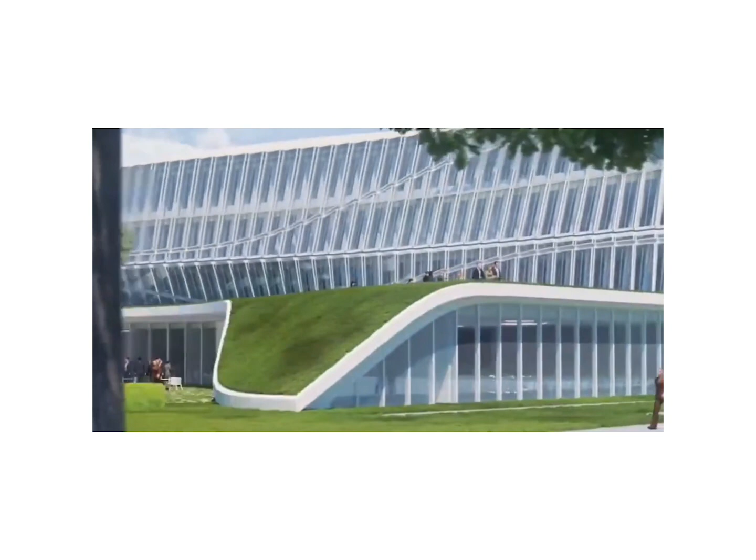The Olympic House serves as the International Olympic Committee's headquarters, exemplifying sustainability and innovation with certifications like LEED Platinum, featuring low energy elements such as photovoltaic panels and rainwater systems. Opened on June 23, 2019, it symbolizes the unity and global spirit of the Olympic Games.

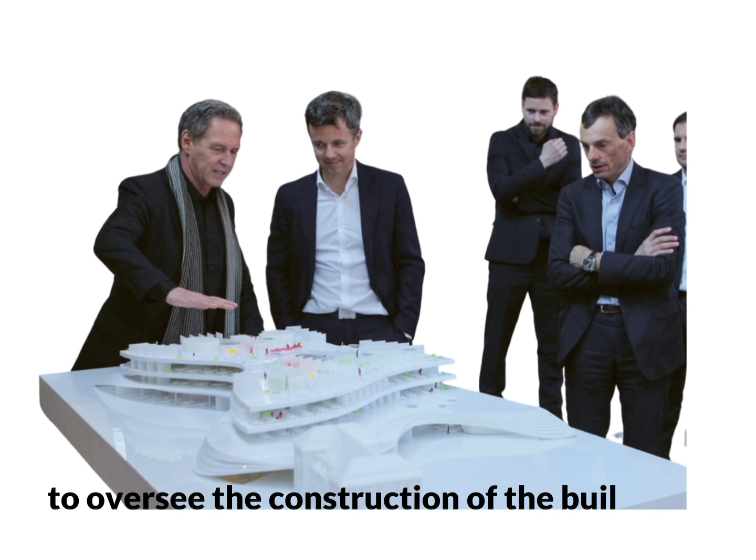The Olympic House was designed by 3XN, who partnered with Swiss architect IttenBrechbühl to oversee the construction of the building. It is located in Lausanne, Switzerland, which has a moderately continental climate varying from -6 to 26 degrees Celsius on average.

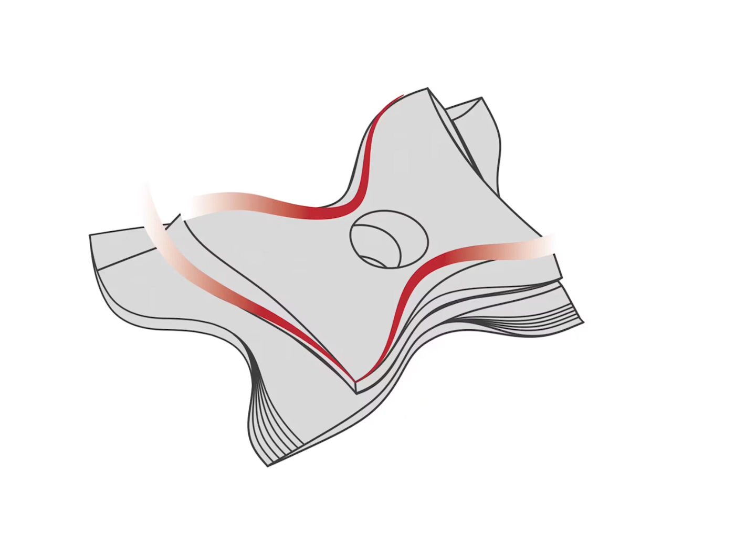Olympic House has been designed around 4 concepts: integration into the natural landscape, athletes at the heart of the structure, peace seen on the roof design, and unity shown by the 5-ring central staircase.

The unity staircase, which references the Olympic rings, soars the full height of the building and connects all floors through a central atrium. More than 95% of materials from the former administrative buildings were reused or recycled, significantly reducing the amount of waste sent to landfills, helping minimize the environmental footprint associated with waste disposal.

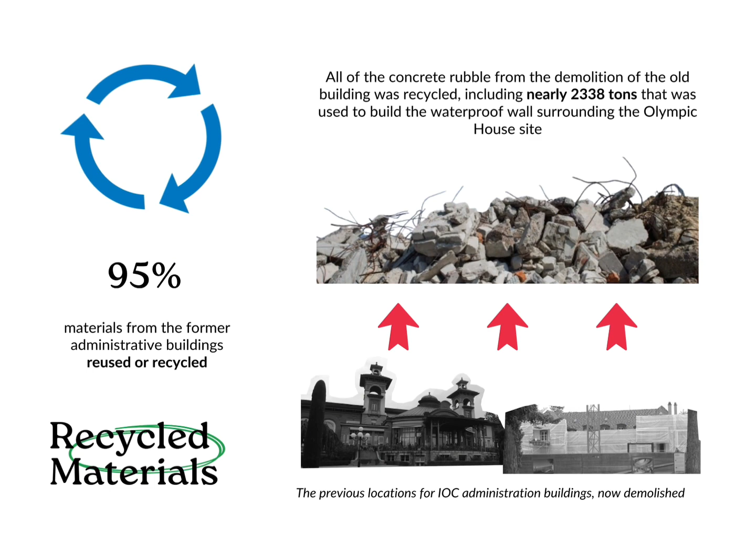Moving on to the electricity and water usage in Switzerland. Lakes, rivers, and streams in Switzerland have no shortage of water, and it is no coincidence that the Alpine country is sometimes referred to as Europe's water tower, as it's rich in groundwater.

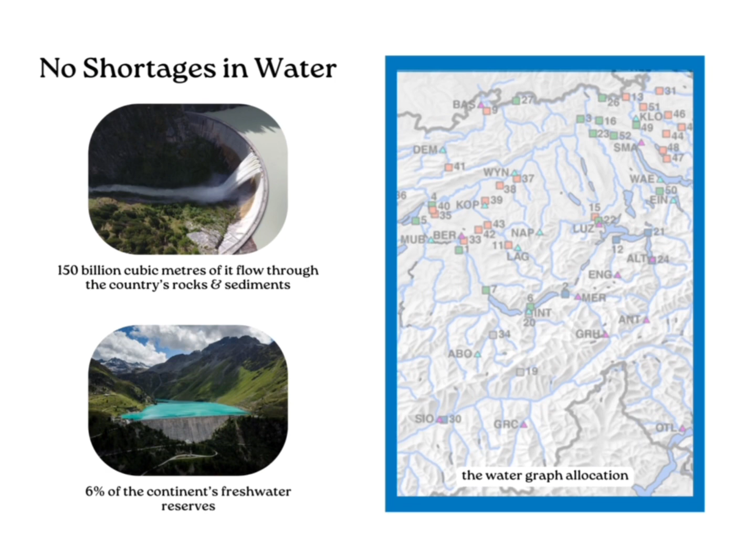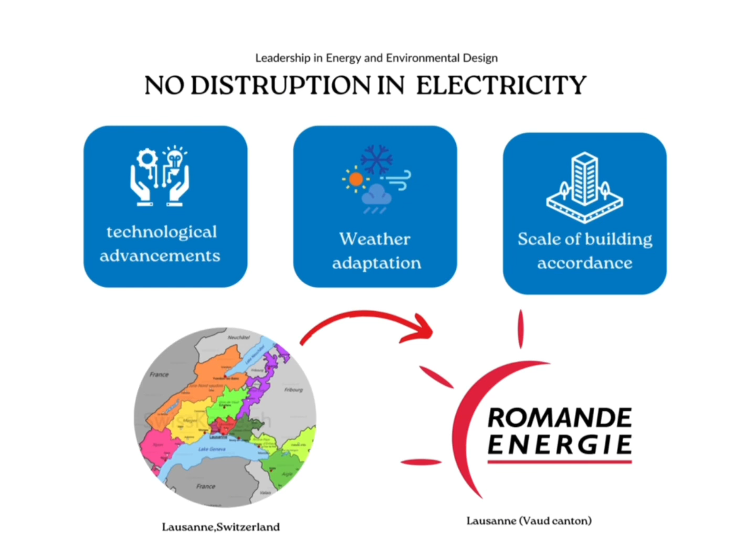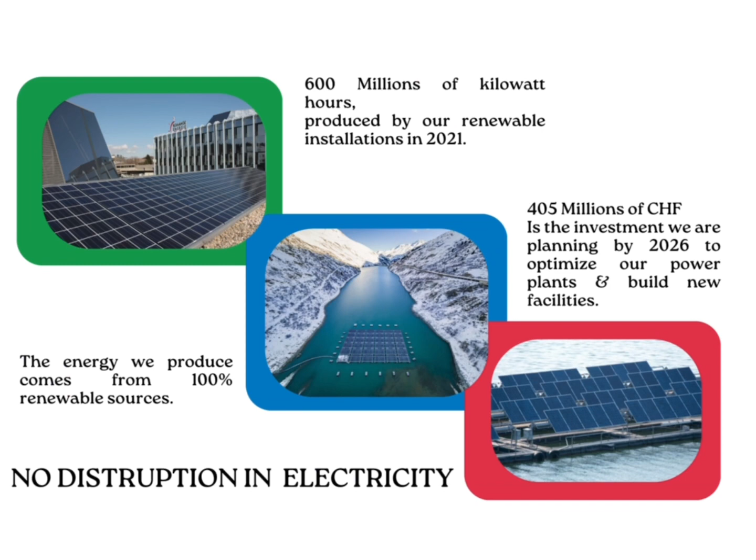Romande Energie, the distributor of electricity in Lausanne, is extremely committed. Their teams are ready to intervene in the event of a disruption in buildings. The quality of the energy they supply is above average, as they ensure to constantly adapt the networks to technological advances and specific weather conditions, which creates no disruptions to the buildings and users.

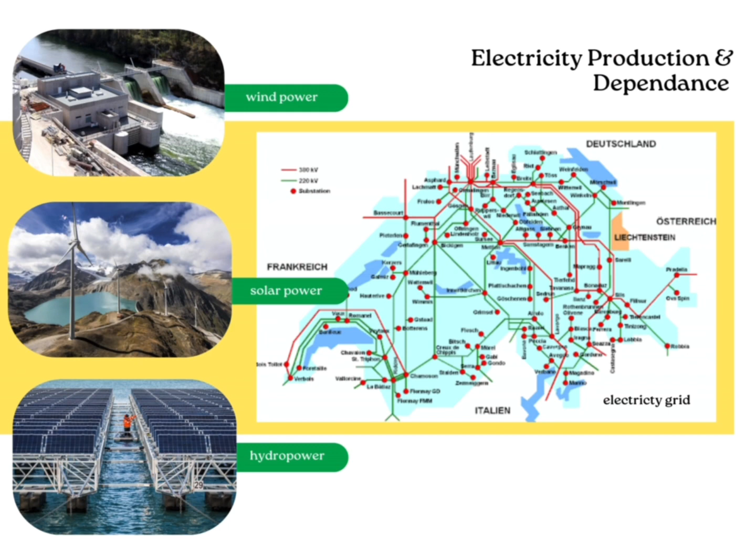Regarding the production of electricity, the country has a diverse energy mix that includes hydroelectric power and renewable energy sources like wind and solar power.

However, in recent years, Switzerland has been known for having relatively high electricity prices compared to other countries due to factors like its commitment to renewable energy sources, which are expensive to maintain.

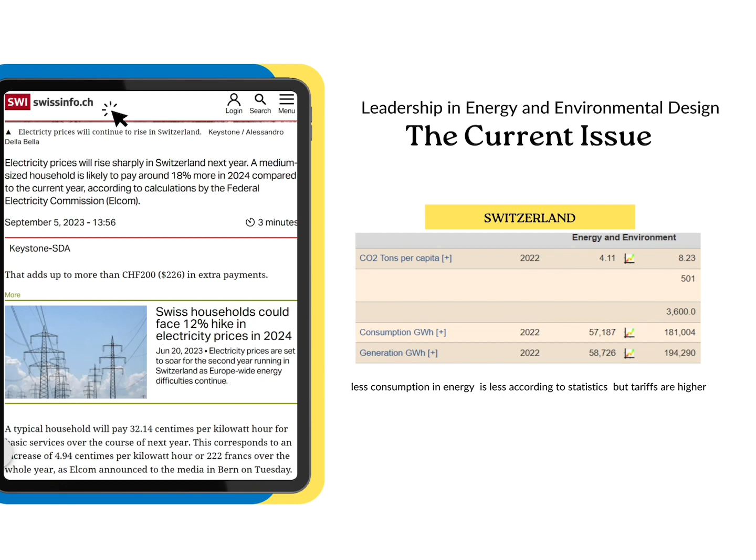Regardless of the high electricity bill, the Olympic House can be manageable in terms of usage and tariff rates due to its energy-efficient practices, architectural building codes, awareness towards the contribution to the built environment, and effective choices, which will be further explained in the video.

Going into the certifications awarded for the Olympic building, we look at the significant award, which is LEED. The Olympic House demonstrates that the IOC is committed to sustainability, walks the talk and leads by example. The Olympic House has received 3 of the most rigorous sustainable building certifications, becoming one of the most sustainable buildings in the world.

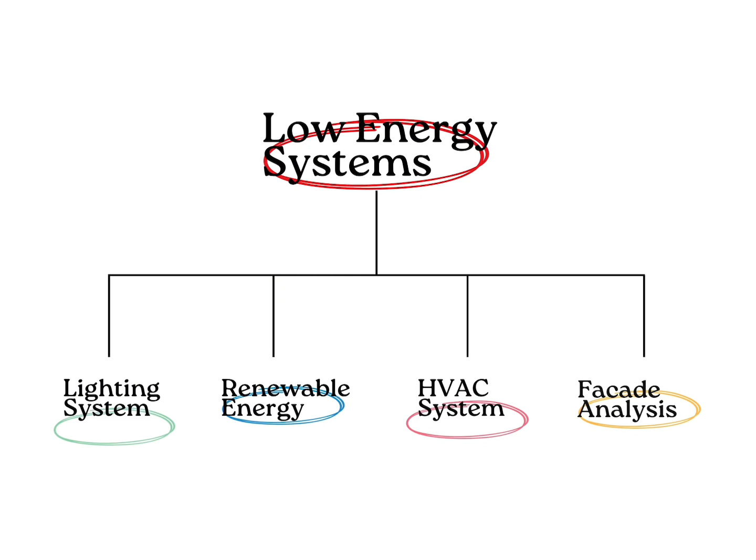Now, let's move on to low energy systems under the Olympic House building. The systems in accordance with the Olympic House are the lighting, renewable, HVAC, and facade analysis.

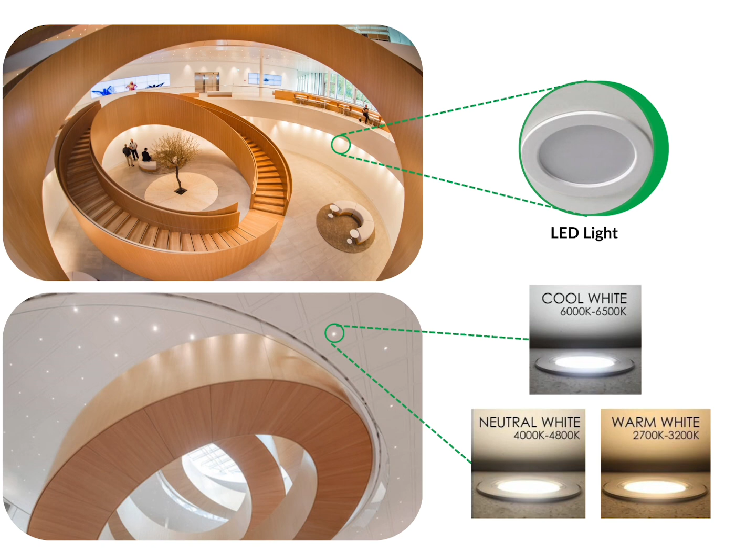The lighting system in the Olympic House is designed by Jesper Kongshaug, and he decided to use LED lighting, ensuring a lesser amount of energy consumption. Next, looking into the renewable energy of the Olympic House.

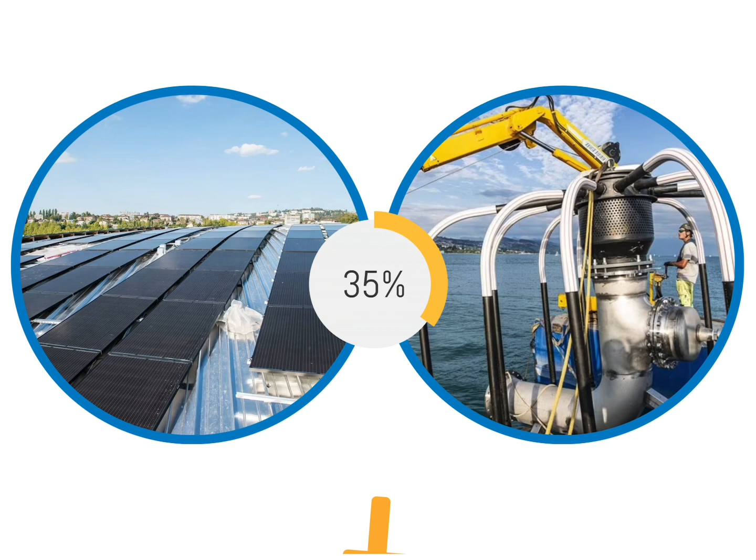The building is mostly powered with renewable energy. By using solar panels on the roof and a rainwater harvesting system, the energy consumption is expected to cut by 35%. Rainwater is harvested and stored in an underground tank to reuse in toilet flushing, car washing, and plant watering.

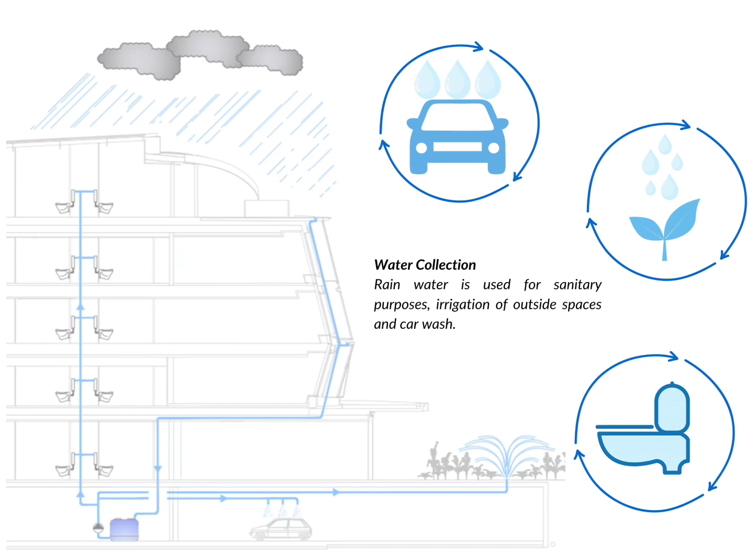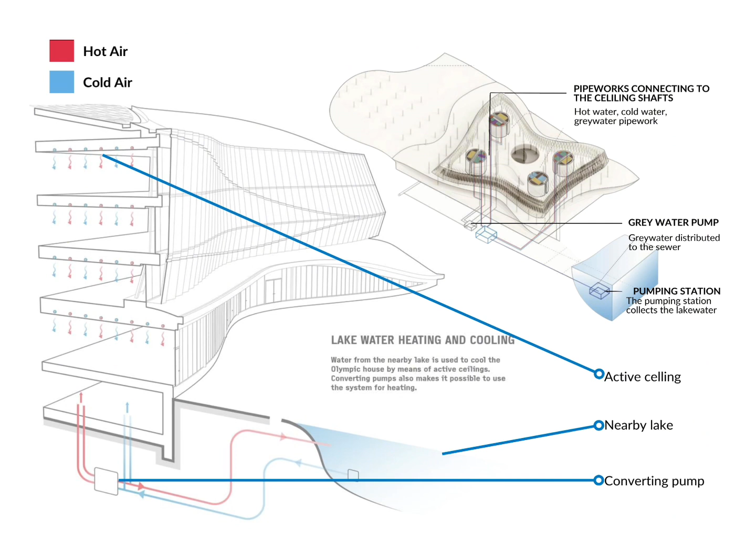To keep the building's interior cool, it uses water from the nearby lake through the active ceiling system. On the other side, the converting pumps for the lake water help heat the building. The Olympic House has water pumped from Lake Geneva to cool and heat it through a 2-pump system, meaning it requires no air conditioning.

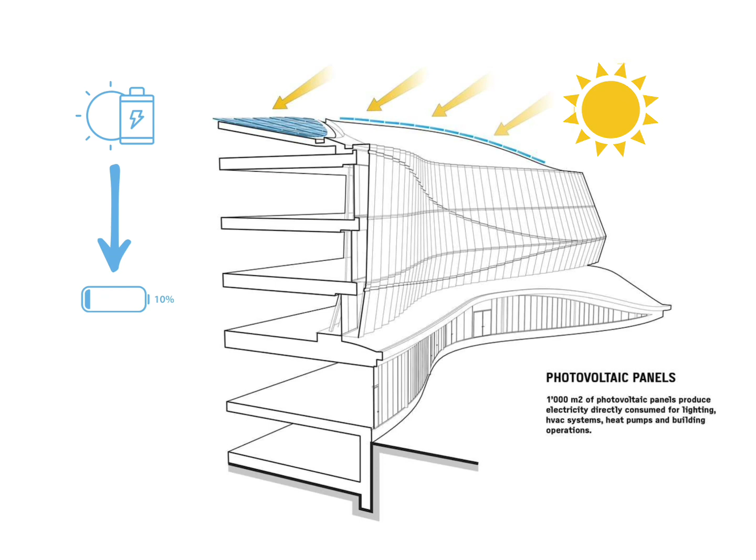There are solar panel modules on the roof that absorb sunlight and convert the energy to bring in 10% of the building's electricity. Shifting our attention to the primary focus of our study, we will examine the facade of the Olympic House.

Zooming in on the materiality, the Olympic House facade consists of a double facade, with the inner facade being 2,300 square meters of glass joined by silicone, and the outer face consisting of vertical aluminum fins supported by an aluminum frame structure for the suspended facade.

The facade is beautifully cladded in triple glazed glass, enhancing insulation by reducing the energy required for heating and cooling, leading to lower energy consumption and operating costs in Switzerland's temperate climate.

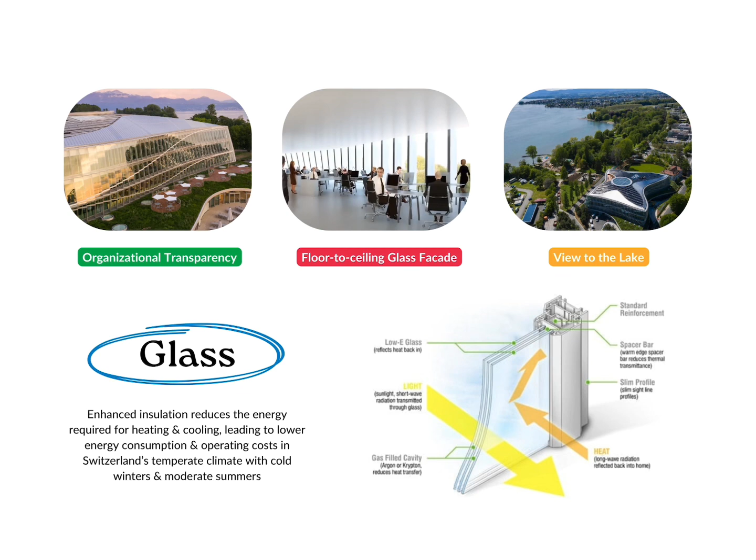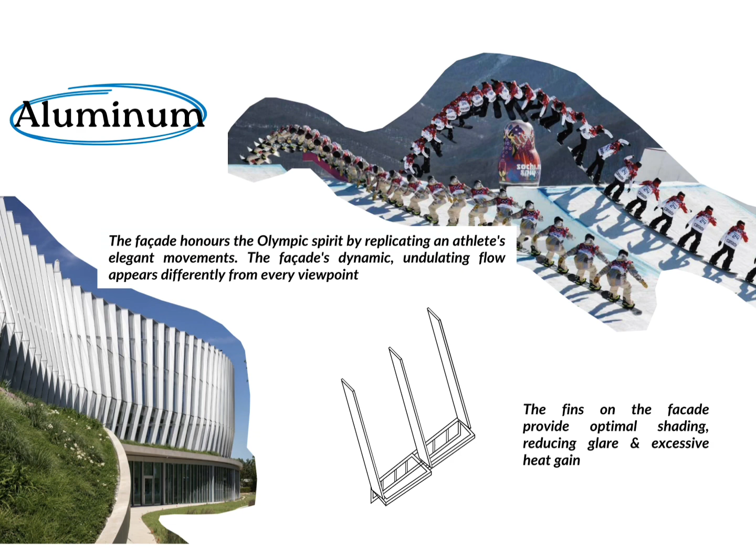Aluminum fins on the facade are strategically placed to provide optimal shading, reducing glare and excessive heat gain inside the building. They pay homage to the Olympic spirit by replicating an athlete's movements, evoking the intensity of an athlete in action. The facade is evenly distributed in a rhythmic pattern.

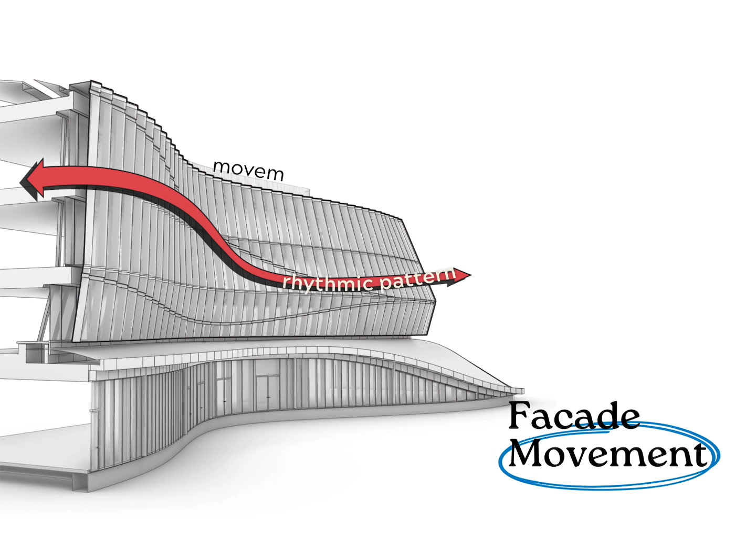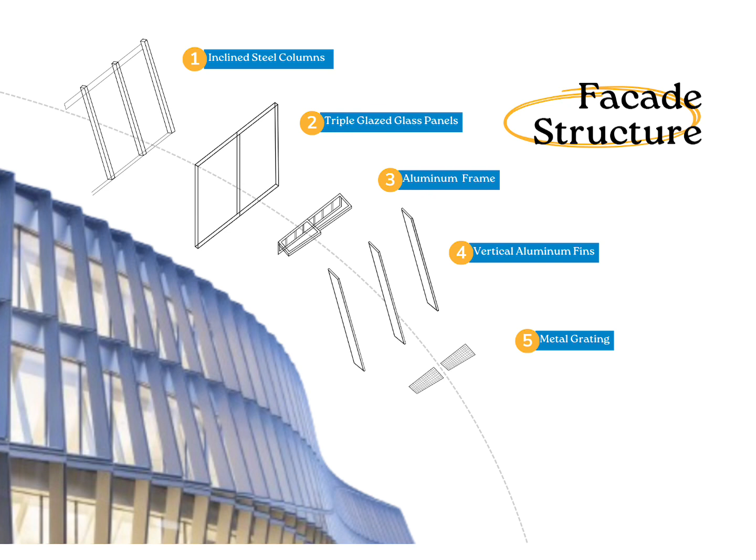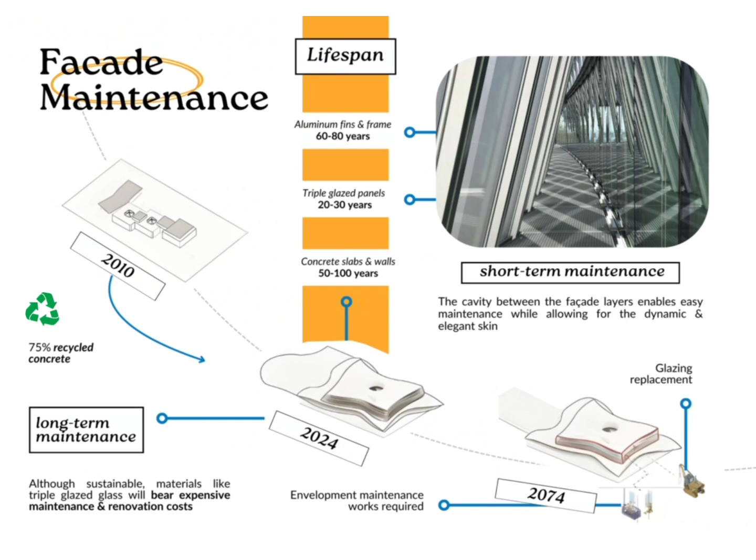The facade is maintained via a cavity in between the double facade, as materials like triple glazed glass require frequent maintenance. However, its long-term energy efficiency benefits outweigh the maintenance and renovation costs due to improved thermal performance and energy savings, positively contributing to Switzerland's environment.

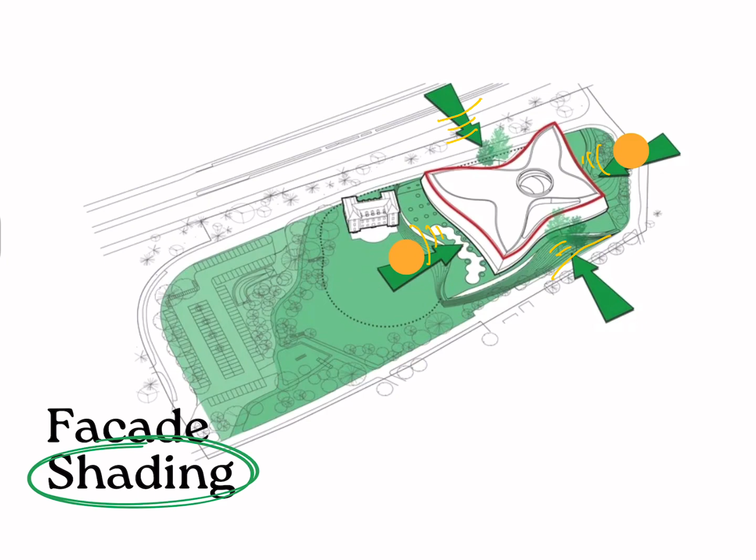Next, the facade shading of the building. A primary factor to consider is the sun orientation. The facade is oriented to optimize solar gain and shading, with deeper overhangs on the south-facing side to block the high summer sun while allowing the lower winter sun to enter, facilitating passive solar heating. For added shading, 50 trees have been planted around the site. This combination of vegetation and facade design creates an integrated shading system that boosts energy efficiency and occupant comfort.

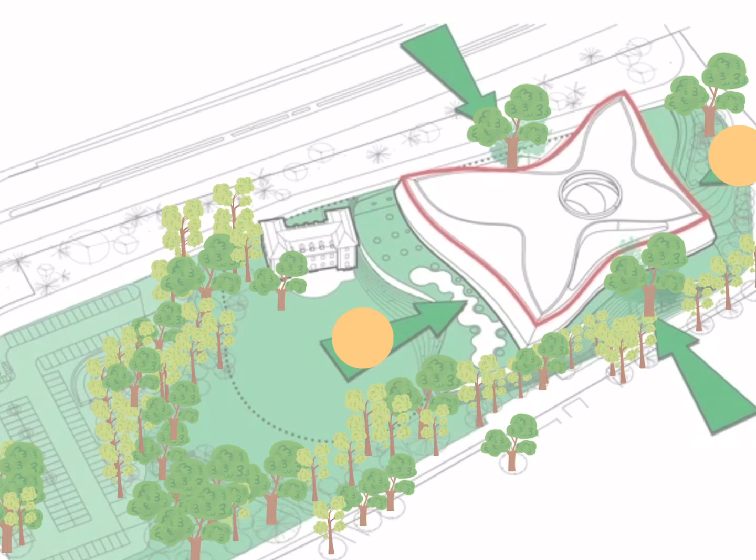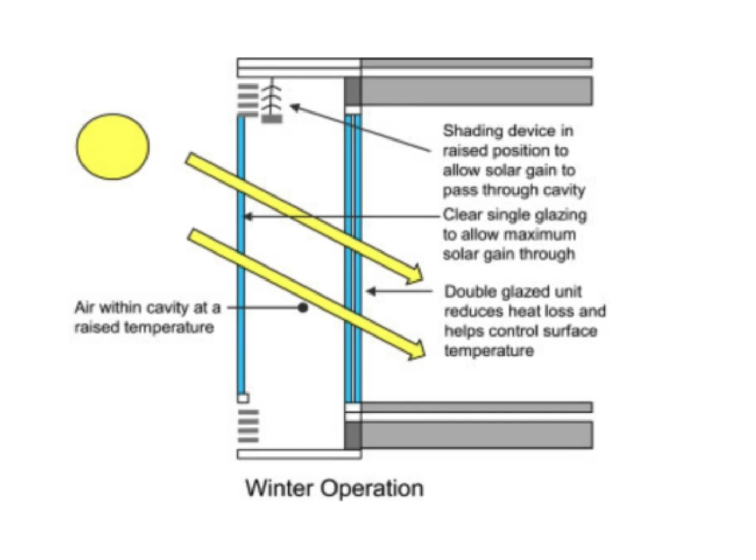In summer, the external layer with louvers or fins shields the building from weather and solar radiation. In winter, the facade harnesses solar energy, allowing sunlight to penetrate and be absorbed by the inner skin, which then transfers heat into the building for passive solar heating. The design maximizes natural light penetration while minimizing glare and excessive heat. This reduces the reliance on artificial lighting, enhancing energy efficiency and occupant well-being.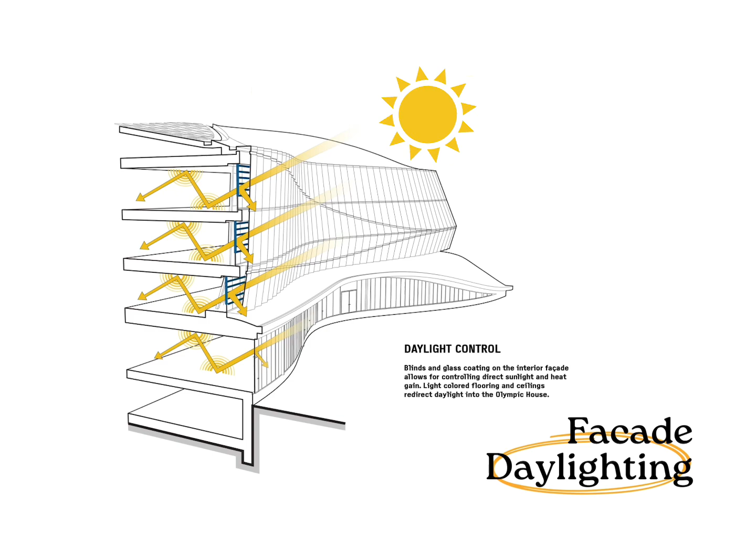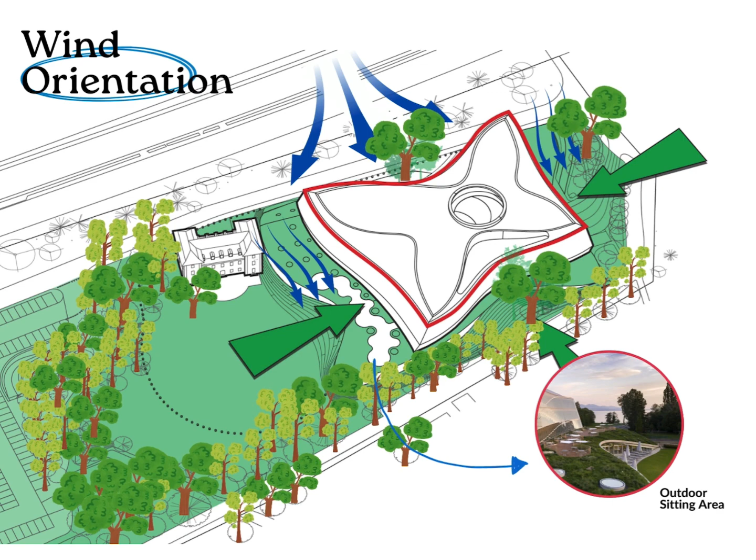Coming into the thermal comfort aspect of the Olympic House, the prevailing wind of the Olympic House is oriented from the north and northwest. It helps to remove heat and moisture away from the building and naturally ventilates the open spaces around the building, like the open outdoor sitting area and activity areas.

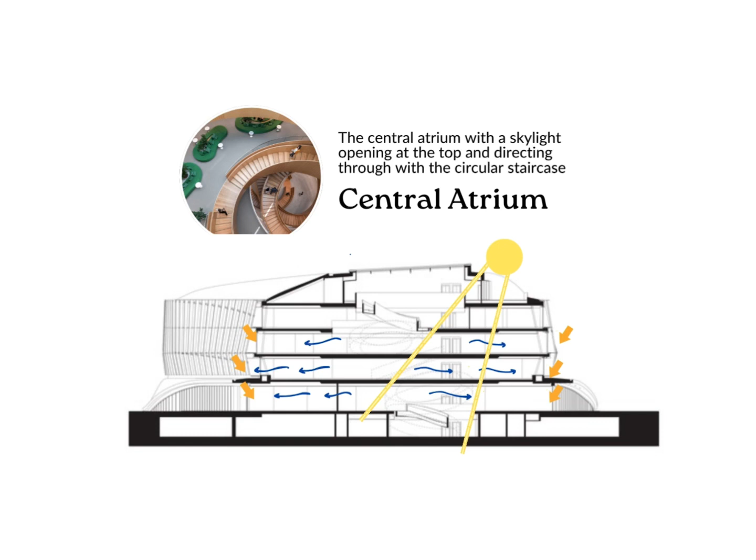The Olympic House's central atrium provides naturally ventilated spaces with minimal barriers to give more efficient distribution in ventilation through spaces. This gives an advantage for ventilation during the summer, and in the winter, sufficient daylight flows through spaces easily from the central atrium. The open layout floor plan of the building creates a permeable layout, which aids in the freedom of movement in between spaces. It also gives an undisrupted flow of ventilation and light from the atrium into the office spaces.

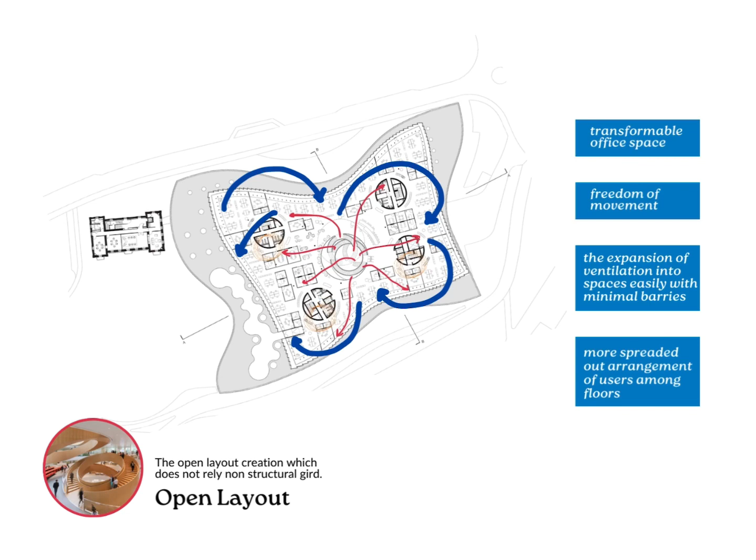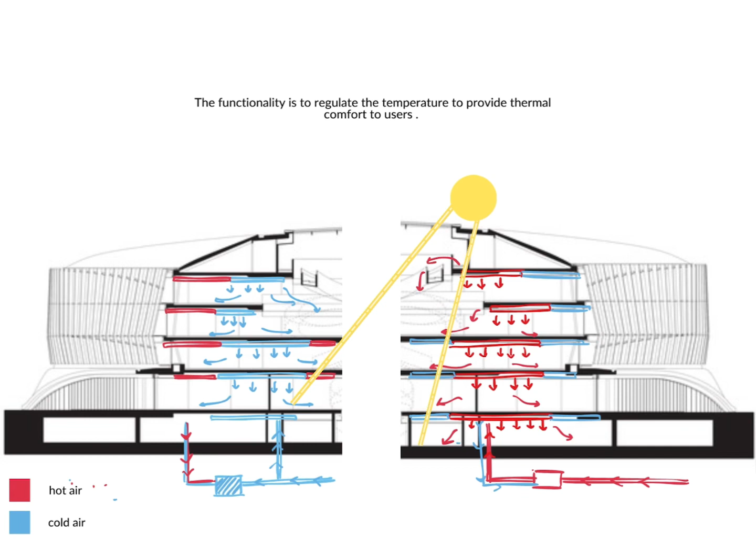In summer, the pumping station uses the cold lake water to keep the interior cold through the active cooling systems. In winter, the thermal mass absorbs the heat from direct sunlight through slabs and walls. The heat pumps extract energy from lake water for heating the spaces. In summary, the Olympic building uses thermal mass to regulate the temperature to provide thermal comfort for users. As a result of these strategies, a lot of energy is saved on electricity and water. The energy demand is also reduced due to the spreading of ventilation and sunlight. Thermal comfort is successfully achieved in regard to changes in climate and temperature in the surroundings.

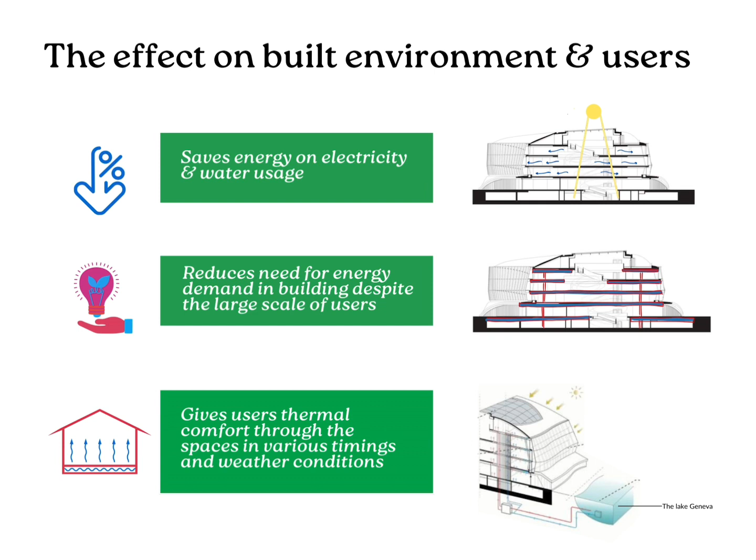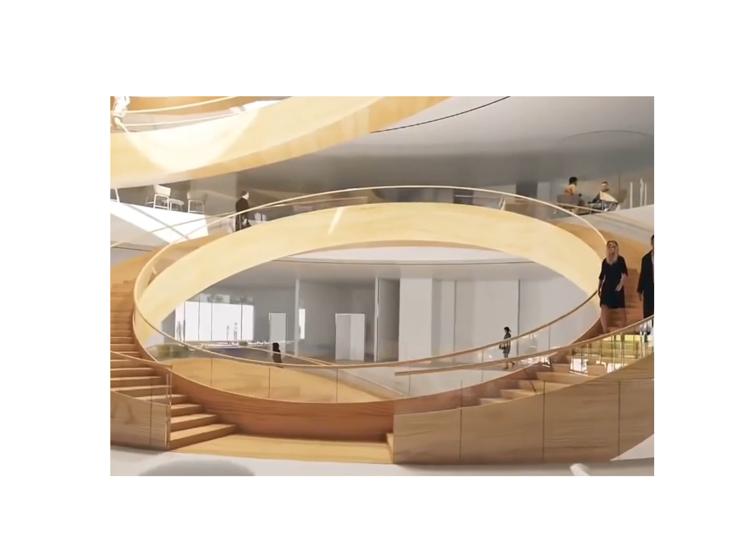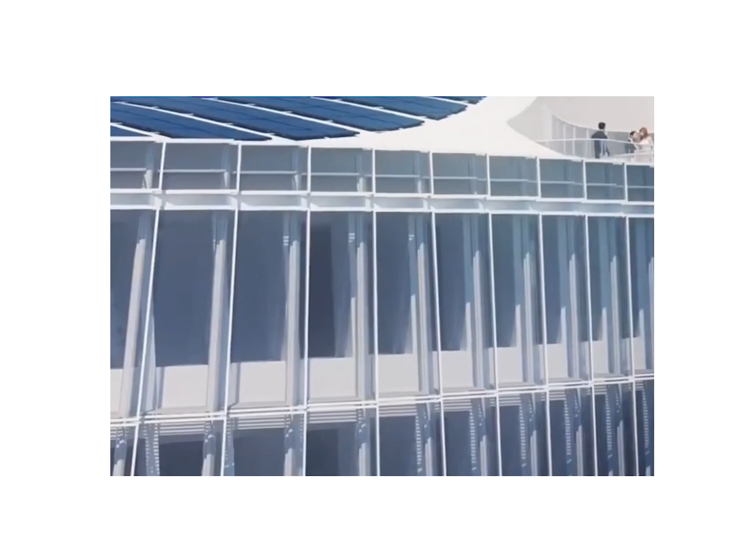Now, we'll look into how the facade impacts user experience in the Olympic House. The double-skin facade at the Olympic House enhances comfort and well-being for users by regulating indoor temperatures, providing excellent insulation, and controlled natural ventilation. It maximizes natural light while minimizing glare and heat, reducing the need for artificial lighting. Improved ventilation enhances air quality and reduces indoor pollutants, allowing for easy breathability. Additionally, the facade offers significant acoustic insulation, reducing external noise and creating a quieter environment for work.

All in all, we've gone into detail on the Olympic House's energy-efficient strategies and how its impact is implemented. We now understand how the different strategies, based on Switzerland's specific needs, correlate with and affect the different energy demands, as the Olympic House is a beacon of sustainability, in which the architects have truly mastered how to effectively respond to Switzerland's environment.